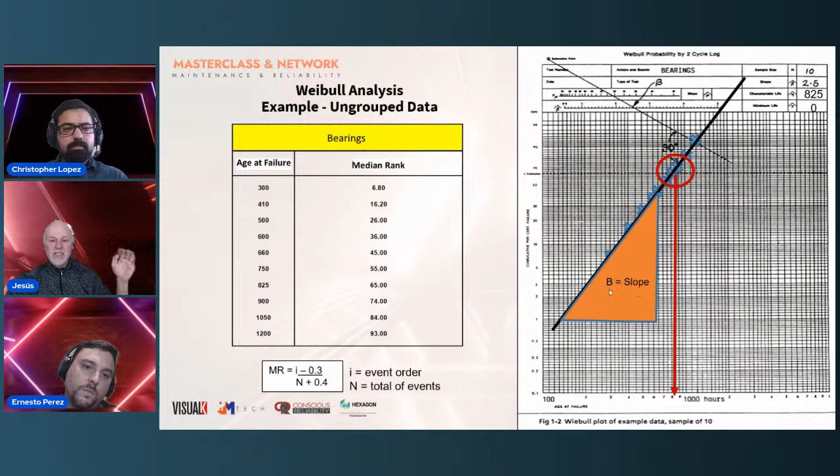So I will go and show you. This is the characteristic life here, 825. The characteristic life is a good thing to understand, to know, but the most important parameter is beta, because this is the one telling you how the failure is occurring, right?

So there is some integration that we do in the RCMR model. In this fuchsia semicircle, we do RCM here, and then we do data analysis, and we compare the opinion that people have given us in the RCM analysis with what is actually happening in the field, and we fine-tune our analysis accordingly. So we manage 3 types of, let's say, data analysis in RCMR.

First one is RAM. These are the KPIs: reliability, availability, and maintainability. This will let you know how the asset is doing in general. This is at the machine level, but at the failure mode level, you will do Weibull analysis. And you select the strategies. Let me go and speak further about RCM.

Weibull analysis. The first thing you do, you sort data by age. Then you determine the median ranks, which is the F, the Y axis values. Then you plot the points. You draw the straight line. Then you look for the inclination of the line or the slope, that's beta. You look for the intercept here with the dotted line, that is going to be eta. And you can also determine the average life or the mean life. So let's look and see some examples.

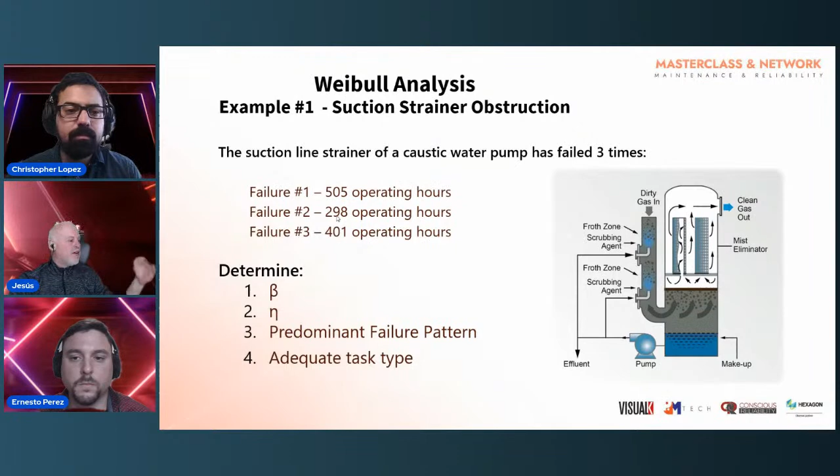You had this sequence, but we need to change that sequence into age. So the youngest failure, 298, goes first, and the oldest goes last, right? Then we use the Benard equation, and we determine the median ranks. So when we determine the median ranks, now we plot. So you see here the plot, 298 here corresponding to 21.2 probability of failure here. This is 0.1, 0.2, 0.3.

When we do this, now we look at the beta, which is the slope. Beta is 3.65. So we have a very steep slope. That means that we have a strong wear out. That is, that failure is occurring by age. There is nothing wrong with the design. There is nothing there that is occurring randomly. This is an age-related failure, and you can do PM to that.

You have a strong wear out, then let's do a PM and change that filter at any proposed time. And there are also formulas to determine the timing for that replacement. You can clean or replace it at some point, right?

But you have a strong wear out. Let's go and see another example. Before we go on, there's a few questions here, and I think it should be a good time now. So there's a question regarding the median rank of bearings. Is that for any type of bearing, or is that just an example?

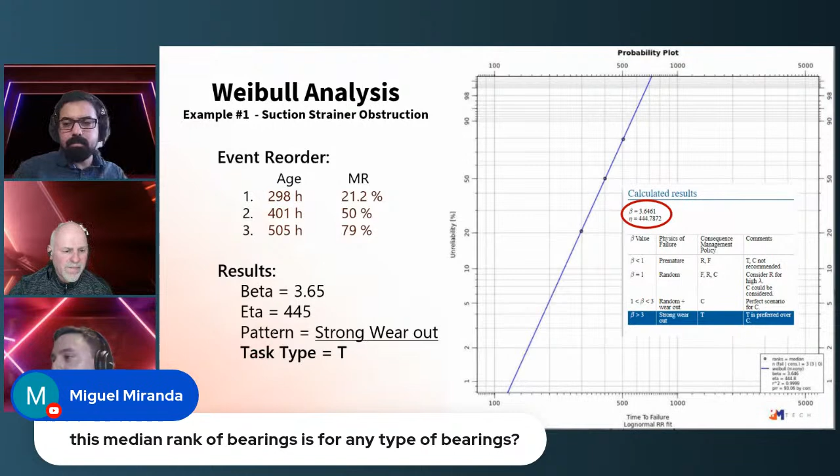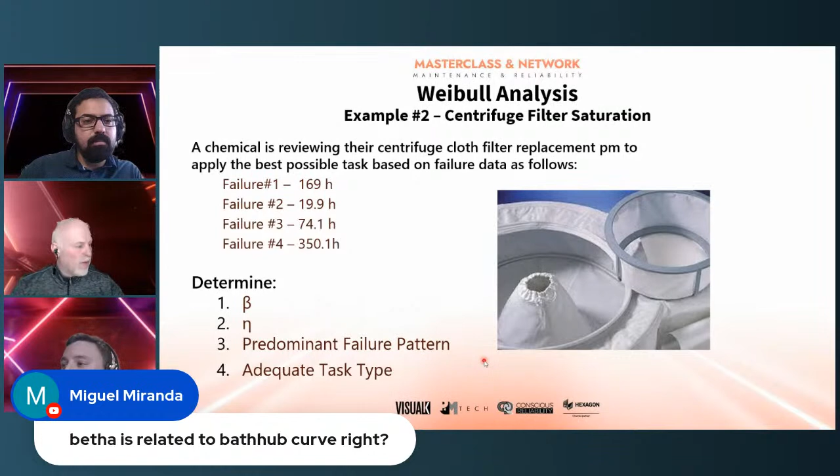Okay. There's kind of 2 questions that I think we can merge. One of them is beta related to the bathtub curve, and the other one is, is there an easy way to use this, using a software to calculate that data and that information, right? So okay, the bathtub curve is a concept, right? It is not an analysis. It is a concept. And you can relate beta here to the bathtub curve.

So here in the premature failure area, you have a beta less than 1. In the middle, you have a beta equal to 1. And at the end, you have beta more than 1. So this is how the beta relates to the bathtub curve. But the bathtub curve is theoretical. It's a concept. It's really a model showing how a hypothetical part or asset undergoes the 3 different forms of failing through the whole life. This is the failure rate in here, and this is operational time, right? So yeah, you can relate the Weibull analysis to that too.

So let's speak about a second example here. We have a centrifuge filter saturation. That is, you have a filter that is clogging, and you have here the times when you have to stop the centrifuge and change those filters. You see here that there is a variety of times. You have 170 hours, then 350 hours of operation, and also 20 hours of operation. Let's do an analysis and see what's going on, because maybe somebody can recommend some maintenance tasks, or a redesign task.

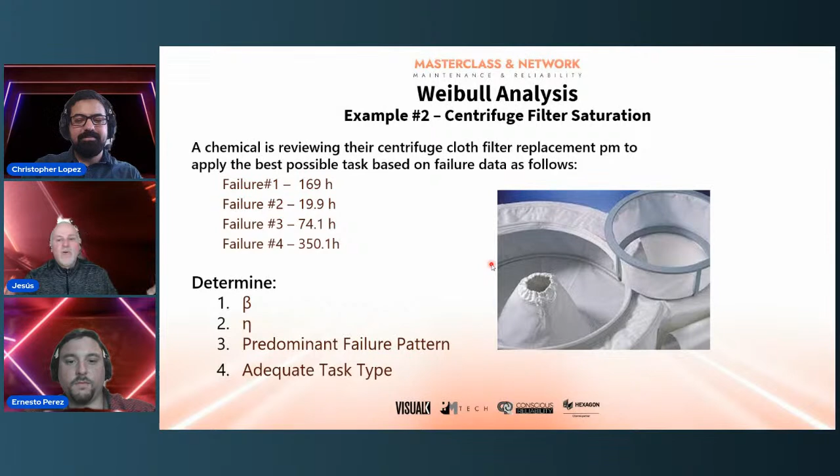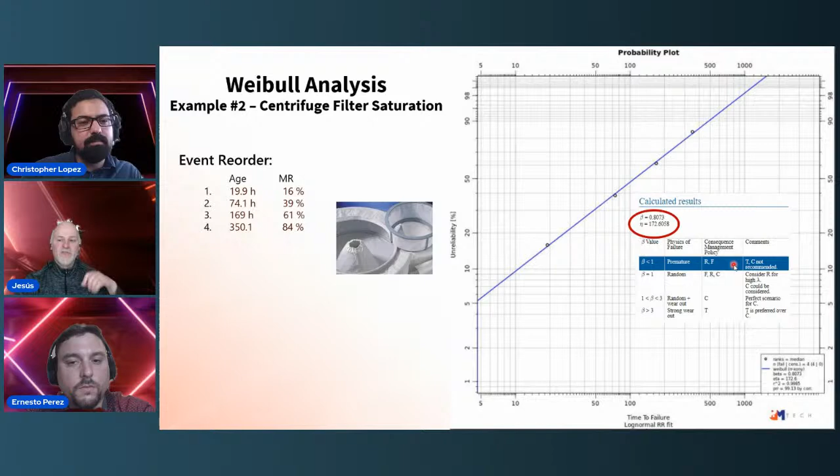We apply Weibull to it, we calculate the median ranks similarly, and we see that now the graph looks a bit different. You don't see a steep line like you saw before with the strainer, right? That means that you have a very low beta. Beta is 0.8. That's a premature failure. And what can you do for premature failures? You have to redesign.

But there is a concept behind redesign. Most people in maintenance and reliability are either engineers or have a scientific or very technology type of background. So you have electricians, industrial mechanics, instrumentation people that have an electronic background. And when we speak about redesign, we think about the machine. We have to change the machine? Not necessarily.

So a redesign in reliability means a change, a modification. It could be a modification of the machine, of a practice, of a procedure, or a tool that we need to perform better. So we need to make changes here. So we either run to failure if the consequence of the failure is not big and we can live with that, or we have to redesign, but we never apply maintenance to it. Why? Because beta is less than 1 and we have a premature failure.

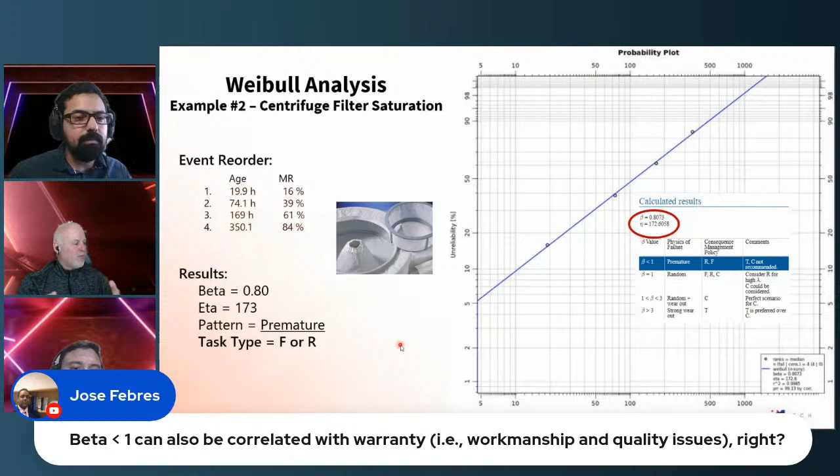Jesus, excuse me, there's another question, and I think this example goes along with it. It's regarding beta lower than 1. Can that also be correlated with warranty? That is a very important question. There is something that we don't cover in the class; it's an advanced case in the Weibull analysis. There is a third parameter called the minimum life. Most of the analysis uses 2 parameters, beta and eta. But we also have gamma, and here we are assuming that gamma equals 0. Whenever you have the straight line, gamma equal to 0 is acceptable.

But there is also something called a minimum life, which means the time up to which the probability of failure is still 0. We call that the minimum life in statistics, and warranties are related to the minimum life. The manufacturers have done lab tests and determined a minimum life. And guess what? They will give you a warranty within the minimum life range. That's why they tell you if it was your fault, you have to pay, because it was not natural wear and tear, natural deterioration.

It happened to me these days. I called the insurance of my car and told them I had an accident. I was taking the car out of the garage, and the back door was up. And they said, oh, it was your fault then. Yes, it was my fault. Then the insurance said you have to pay this amount, and the warranties are with regards to minimum lives. Okay.

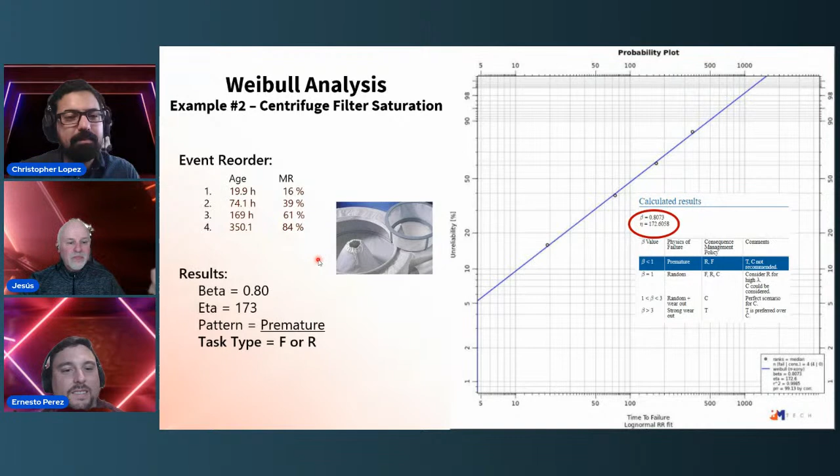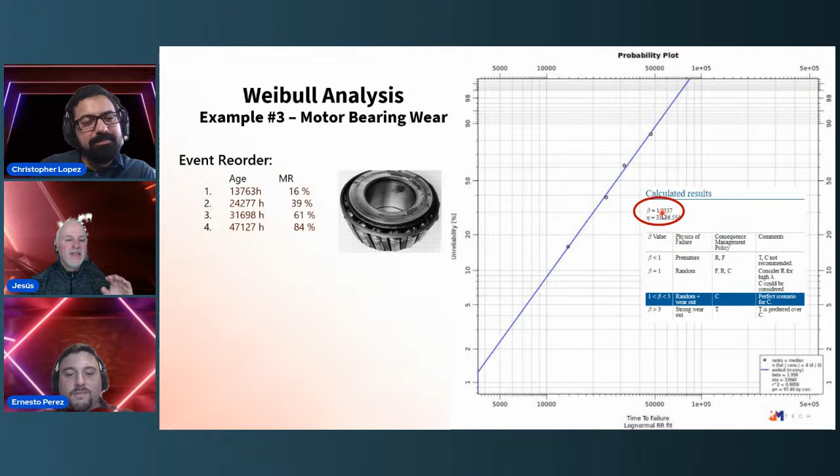Bear in mind that this is the same application. This could be 4 different machines, but the same bearing, same speeds, same application. Everything has to be within the same operational context. So we have these 4 failures, then we have this graph. What's beta? Beta here is 1.9, about 2. You see that beta is not 1, not random. Beta is more than 1 but less than 3. So we have a mix of random and wear out failures together.

When you see that transition, that's the perfect scenario for condition monitoring. You have some random and some wear out failures together, so it would be easier for condition monitoring to find a potential failure condition. Whenever you see this, try to figure out how to monitor a health indicator of the machine. Here beta equals 2, and eta, the characteristic life, is around 33,000. We know we can do vibration analysis and ultrasound for bearings, and also oil analysis if it is oil lubricated.

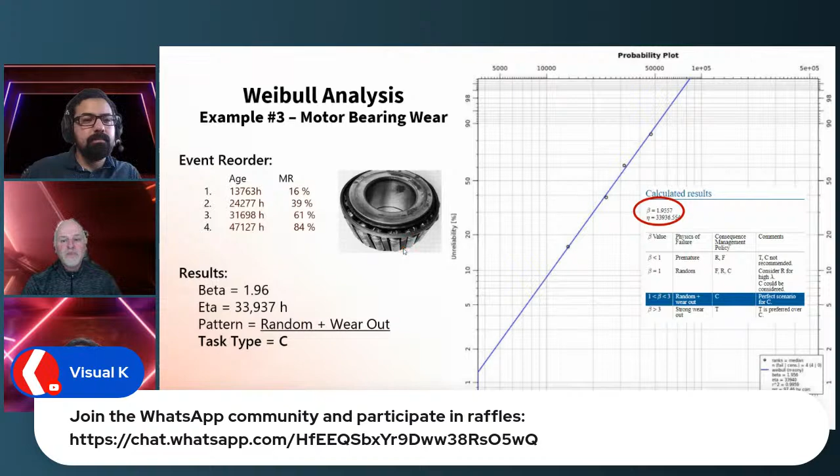So, as time came to an end, as a summary, we spoke about RCM as a very strategic tool to develop a strategy, a maintenance strategy, and also operational and some other things in maintenance like redesigns. Then we explained that

RCMR, which is Reliability Centered Maintenance Reengineered, incorporates life data analysis or Weibull analysis into its RCM analysis. We explained how to interpret the Weibull plot. Remember that it is going to be a straight line, and you will look at the slope of the line and the intercept of the line at the 63.2% probability of failure. That will give you eta. And then we saw a couple of examples with life data, with actual data.

And it is very interesting because in our advanced RCM classes, in our REAM class, Reliability Engineering Applied to Maintenance, we encourage people to bring their own data. And the class becomes basically a consultancy session. So I let the people use data, do your own analysis, and let's speak about the analysis. Let's see if the decisions you're making without knowing that you had that data are in accordance with what this technique tells you.